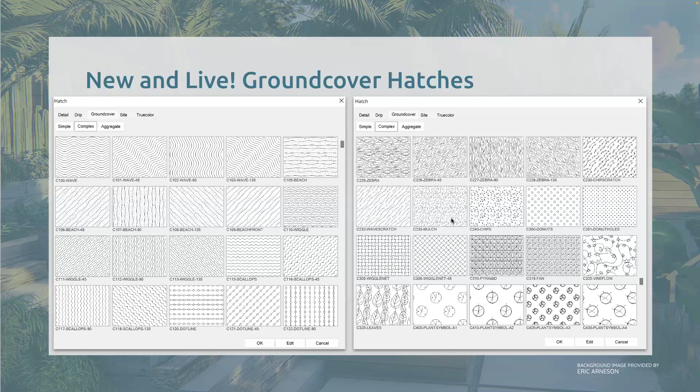This also means we've been able to experiment and start adding new hatches. It's actually on our roadmap for content to add even more hatches to this library. If you have an example of a hatch or pattern you'd love to see, even one you hand drew yourself, send it in to us and we can see about making it into a real hatch now that we have this process nailed down.

Next, new and live: we have Revit type parameters for the Planting FX Revit plugin. There's a guide, and you'll get a notification if you have an existing plan with instance parameters on how to upgrade that to type parameters. Please reach out if you're having problems with that. We're working through a few things on it, but we have a lot of new Revit stuff coming up that relied on that fix.

Next, we're starting to reach out more about what people want in terms of wish lists, starting with a survey. Molly put a survey onto our community forum at landfx.com/community. I encourage you to open a browser, go to landfx.com/community, it's pinned to the top—Molly's 2-minute survey. I recommend filling that in to help her know what you need in terms of expanding the database for our plants. Depending on how successful this is, we might do this again for other features, or make it a regular habit.

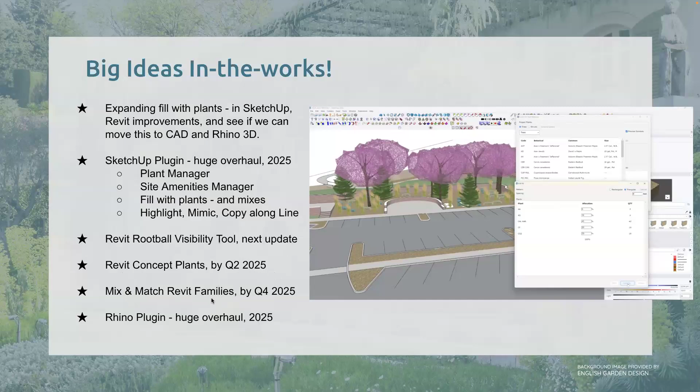Anybody who uses Revit has probably already heard me talking about that. Okay, last slide before we jump in and really start to tackle some of the questions popping in: do you have a suggestion? I just gave you a lot of things, all of these were big ideas that somebody asked us for, and now we're doing them. So how do you get your idea noticed and to the top of the list? Because I can tell you, it's a long list already.

When you put in a suggestion, please be kind. We're human. We've dedicated our careers and lives to this software, and we're really proud of the things that we've done so far. So please be kind in your suggestions. That really goes a long way to getting us to notice your suggestion too.

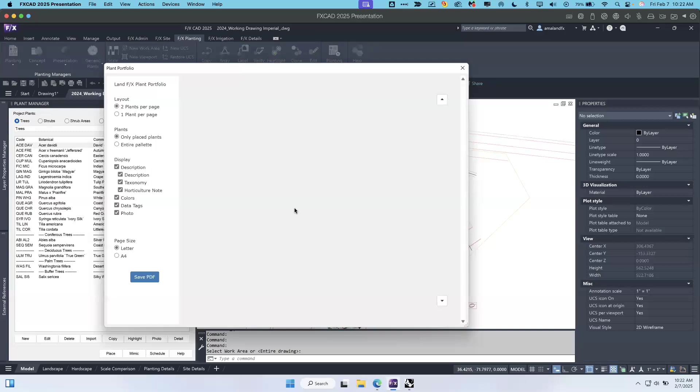So I'm just going to click this, and I'm going to do the entire drawing. It brings up a web browser. This is a little bit improved from the last time that we showed this. You can now do 2 plants per page or 1 plant per page. I've just condensed it down to 2 plants here, only placed plants or the entire palette.

And then you can choose what information you display. Don't want to show colors, not really important to you, take it away, it updates. You can also add it right on back. Don't want the photo? You should want the photo. But if you don't, you can take it away. You can customize how this looks.

You can choose the page size. Right now we just have letter or A4, but do give feedback on an example of how you want it to look. If you feel this really needs a different page size, give us feedback on how you would want that layout to look. What are you aiming for?

Any feedback on this plant portfolio - that's exactly what we want, to see that example of what you are trying to achieve. Helps us out a lot.

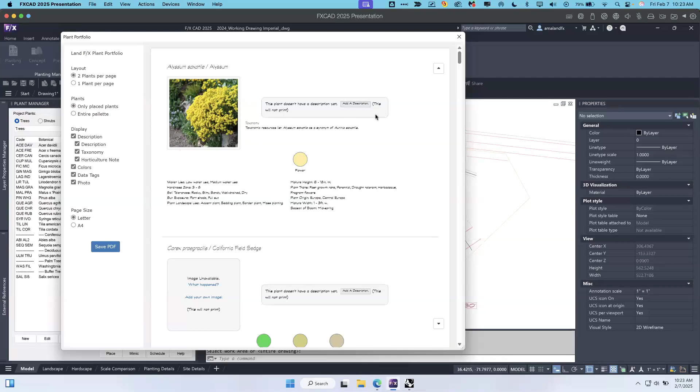So right now it's obviously still in its infancy, so some things need more information on the plant. Like this one doesn't have a description yet, so I can add a description, but as it says, this will not print. And I can go through - this says image unavailable, what happened? Add your own image, that's the process I was talking about.

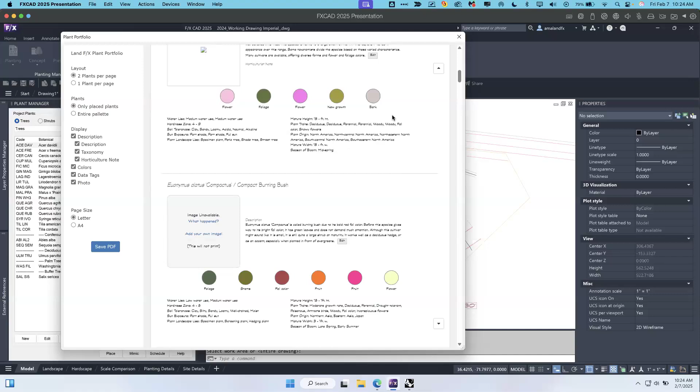So you can see all of this - this will not print. And when you save this PDF, obviously that kind of information is not going to show, and you will just get that final PDF that you can present to your client with more information about each plant in here.

So that is really cool, definitely give that a shot. You'll also notice as we go through here there are flower colors and flower accents, and that affects how things show in the bloom schedule as well. So you can absolutely add all of these.

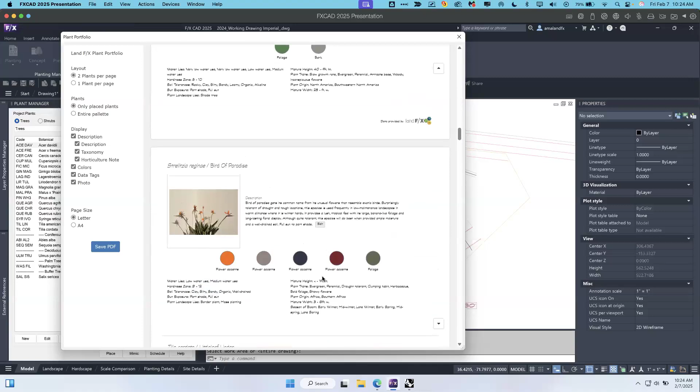I am going to close this, and then the other thing I wanted to show was the new SketchUp tool. I see somebody just asked how do I find and install the SketchUp plugin. You do want to go over here to the 3D connection, and in here you're going to see this link right here - here's our plugins for all of those 3D connection platforms.

If I click this, it's going to take me to this page, and you do have to install it using this RBZ right now. While we are doing these improvements, we have pulled it from the SketchUp extension warehouse, so you can only install it from here. And if an update is needed, you also have to install the update from here, so keep that in mind.

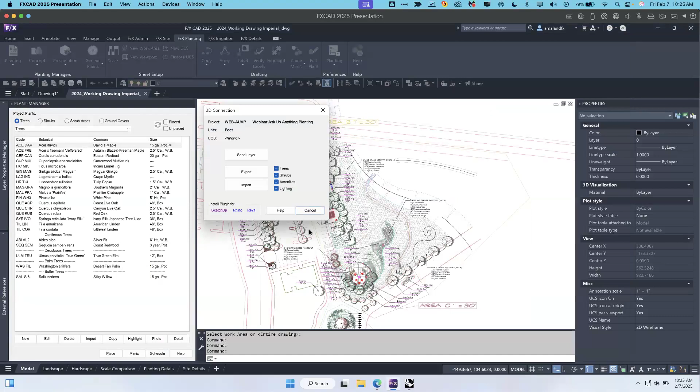Let's keep going - I'm just going to go over to SketchUp. You guys have probably already seen, a lot of you already know you can take all these plants and export them to the 3D connection and import them into SketchUp. But I'm going to go to SketchUp just to show you some of the new things that are coming in.

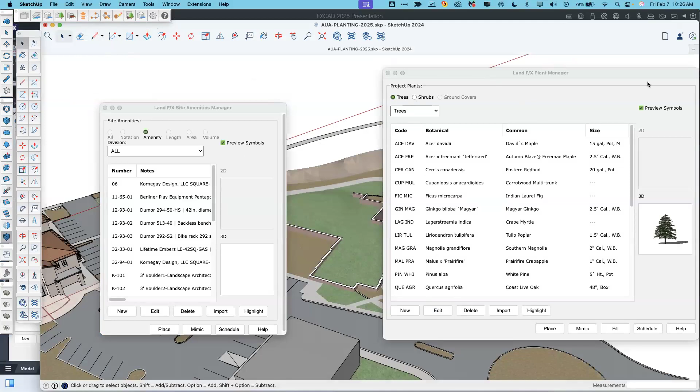So this is the new toolbar. I'm not sure when this is going to be live, but a lot of the things on here are already on here. The things that aren't are this plant fill or mimic and fill and copy along, as well as this plant manager, and the site amenities manager does not look like this yet.

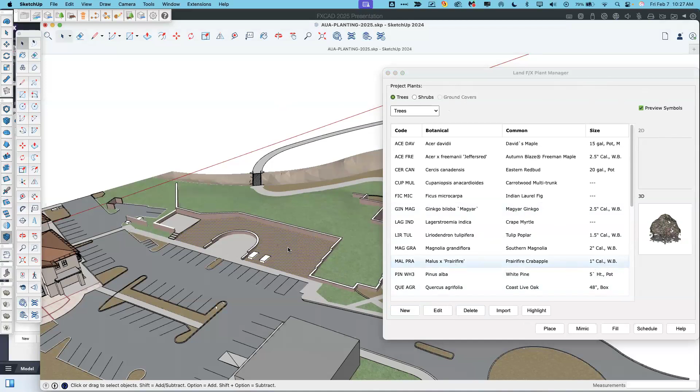But then I can place from here, and I'm going to see - yeah, I can select a face. This is the really cool one - and then do fill, and then choose plants, plural. I can do plural plants. So let's see if... oh, I don't know if that one has a symbol, but we'll see.

Let's do this one, and where's another, not a tree. Let's see, red twig dogwood. There we go. Okay, I'm going to go next.

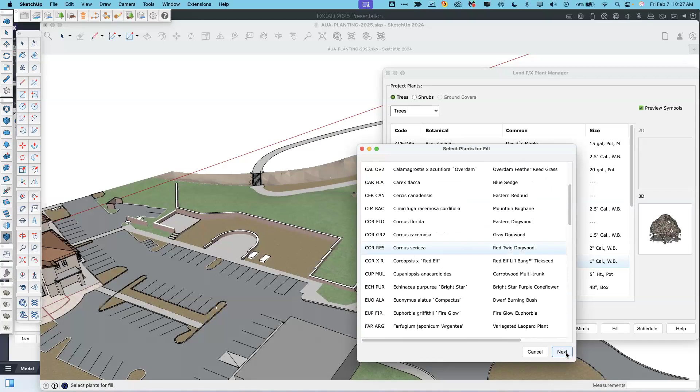33%, that's fine. I'm going to do maybe 10 feet so it doesn't go crazy, maybe even 20 feet, just so it doesn't have to calculate too much, and apply. There we go. I can reapply, and it should shift that around. Still working on the performance on it, but it is thinking through it. Maybe I'll go a little bit smaller and apply.

And you can see it's going to get rid of the existing plants already in there. So like a scatter tool. There we go. That is our first iteration of this.

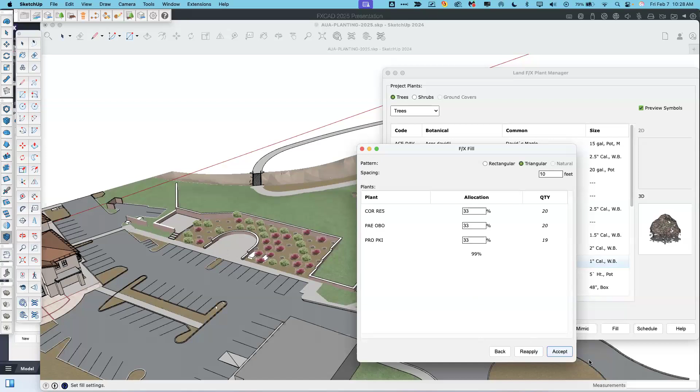And this is going to expand to all the platforms, hopefully, as soon as we work out in each API how to accomplish the same thing that we're doing here in SketchUp. I'm going to accept that. Let's go, and it's going to be okay once it's done.

Okay, let's go back to CAD though, while that finishes thinking, and let's figure out what questions we want to answer so far.

Who's first up? Yeah, we've got a few. Oh my gosh.

First, a couple of people work with flats, and it sure sounds like they were unaware of how we have that already built into the software. They both say how they're doing those flat calculations off on the side in Excel or something. So if you could just show how to assign flats to a ground cover, that'd be awesome.

Yeah, let's go to a ground cover, and I'm going to grab this creeping thyme. That's a common one that would be in a flat in different plugs. So I'm going to edit that one over here and change that from a number 1 size pot to let's go with flat over here, and the container type I'm going to say plugs.

And then that adds to here instantly, that flat count appears. So that means what you're going to do is go ahead and say how many plugs are typically in that flat. So let's say there's 24 in a flat, and we're going to keep this plant spacing at 4 inches. And I'll say, okay.

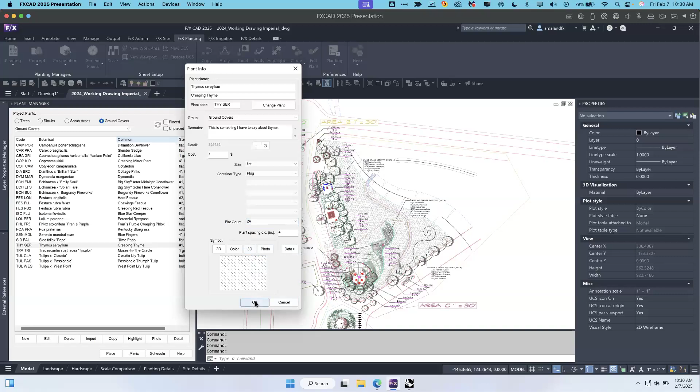It's going to update anything in here, but just to be sure, I am going to do a rectangle over here. There we go, nice big area. Lots of creeping thyme. Place. There we go, there's that creeping thyme placed.

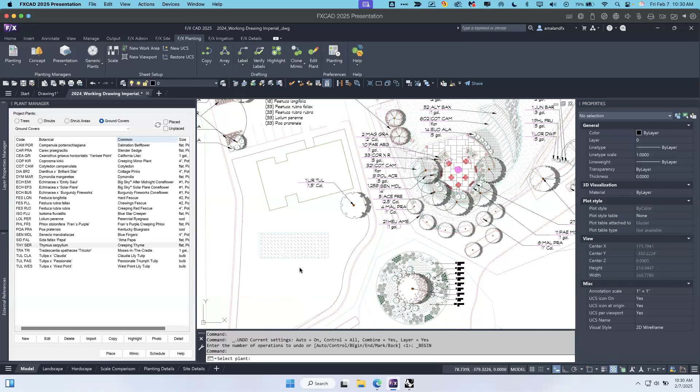I can do a label. So when I do a label, I can grab this one. It is going to show the individual quantity of plants in that area, not the flat count. That is actually how many plants in that area.

And then when I run a schedule, let's go over here, schedule. Yep, looks good, symbol code. Awesome, okay. I'm just going to do the whole drawing instead of a work area. It's going to go real quick. Love the new plant schedule.

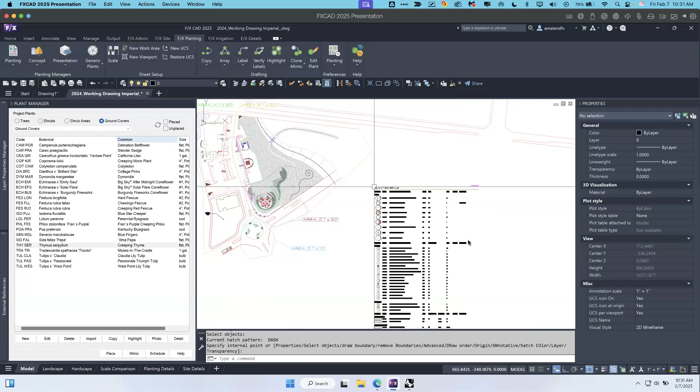Okay, let's go down here. Thymus, it's a flat. And this quantity shows the number of flats versus the individual number of plants. So that is how that works.

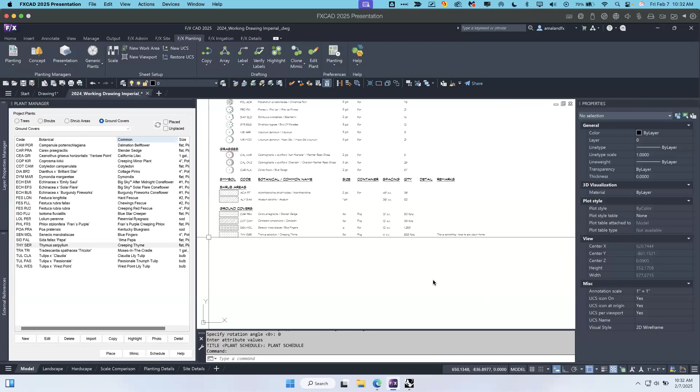always nice to show Mimic, all the amazing uses of Mimic, and it's a good one that people tend to not be aware of. Can happen.

Yeah, absolutely. So I've got a bunch of different trees in here, and based on comments, I need to change them. Just the species, I can go up here to clone or mimic and drop that down, and it's clone just does the copy of the plant. Remember, we do recommend using clone or Xcopy or any of these tools to copy a plant block instead of the native AutoCAD copy command. It just carries the X data with it. But same with mimic, mimic is even better.

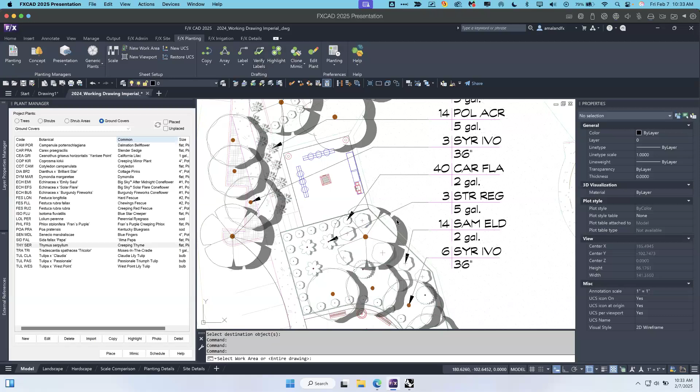So I can grab mimic and I can take this symbol and apply it to this one, and boom, now it's that real plant. And if I run verify labels, it is going to tell me that now this plant is unlabeled, so it must still be being picked up by something accidentally. This is a test drawing on me, but that's how that works.

And then the other cool thing about this is Mimic can actually even turn blocks that are dumb and have no data at all. So this motorcycle, it's just a block that we got from this Plan Graphics, a motorcycle block we put in here for context, right? Has no data on it at all. It's just a block.

So I can copy that one around, or I can clone it as well. Copy, there we go. I have a bunch of these.

I can actually use Mimic. I'm going to go back to FX Planting and use Mimic. I'm going to grab this shrub and mimic it to this block.

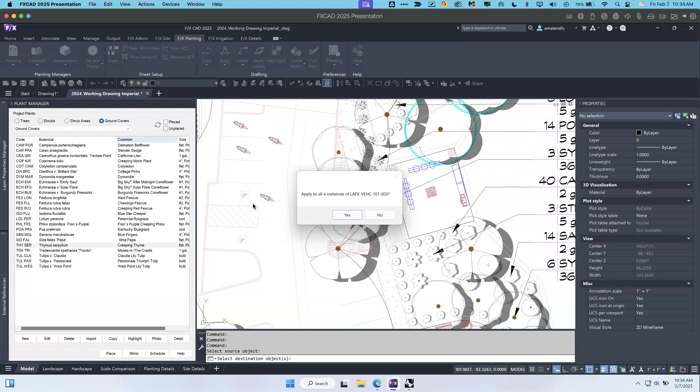Already it's saying, hey, that's a dumb block. It doesn't have any data, not a smart block. I notice there are more than one of it in this drawing, and I'm going to give it data. This tool is going to give that block data when it mimics it, but it sees there's more, so it's asking if I want to do this to all of them. I can just say yes.

Bam, all of these are now shrubs. So I can go ahead and group label them just like that, and they'll be included in the schedule.

So you can see this is super powerful if you're trying to convert, say, a plan that your office did before Land F/X, or a plan from a surveyor or something like that. Very powerful to get data on all of those items, and it's so quick to transform all the blocks into the right thing.

Then you have the power of the plant labels, the plant schedule, the verify labels, the highlight, and all these tools that rely on that data. It's always a good idea to convert an old plan, it will always save you time, pretty much.

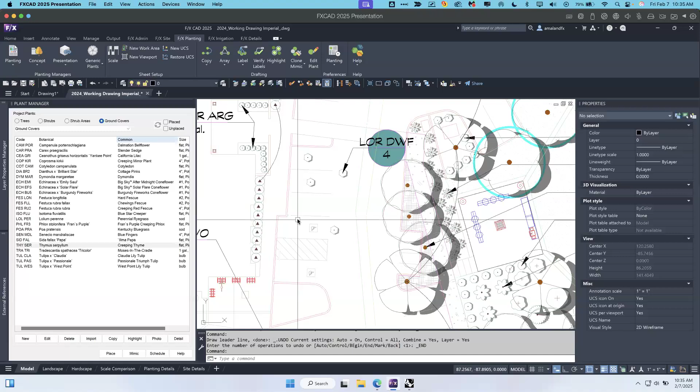That is Mimic. Did I miss anything on Mimic, do you think? I don't think so, but I'll admit I was busy with all these other questions, so I wasn't exactly following. I'm going to assume it was great.

Another great one is work areas. Patricia chimed in and sounded like she just hasn't been using work areas. And then another person chimed in—I just didn't grab their name—saying they'd love to see the all work area option when sending to Excel.

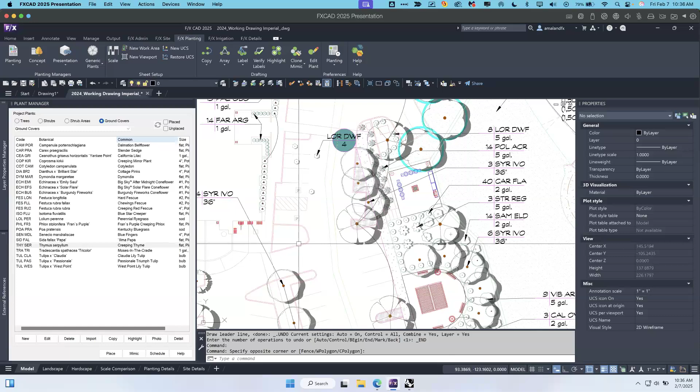Okay, let me see. I really think it's just for organizing the quantities, but then specifically seeing, either for a schedule for just a single work area or the all work area option, how that comes up in Excel.

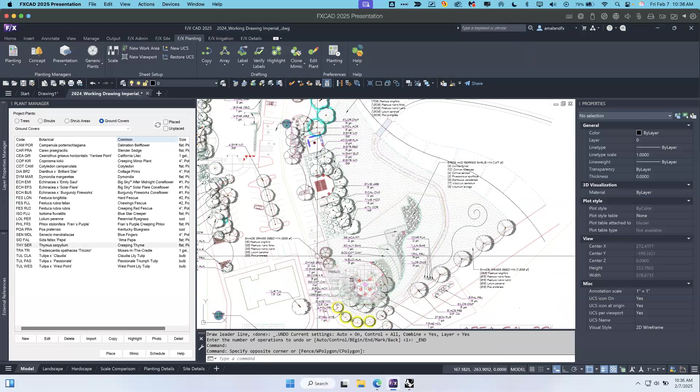Okay, it looks like I've got to install Excel on this presentation virtual machine, but in the meantime I'm going to get it running on my Mac because I know it's there. One sec, Excel—there it is, okay, I know I can open it up over there.

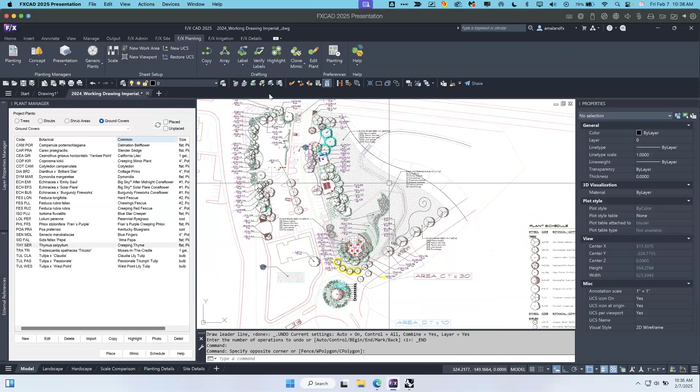And so let's start with work areas. Let me get rid of this highlight because we don't need it at the moment. So I do have work areas set up in here. We're having a problem refreshing the view—there we go, okay.

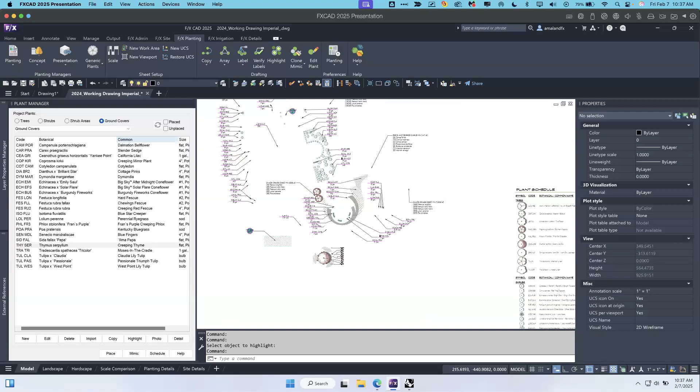So for instance, I have a work area down here, area D, and I actually have set this work area to a different scale than the rest of my drawing.

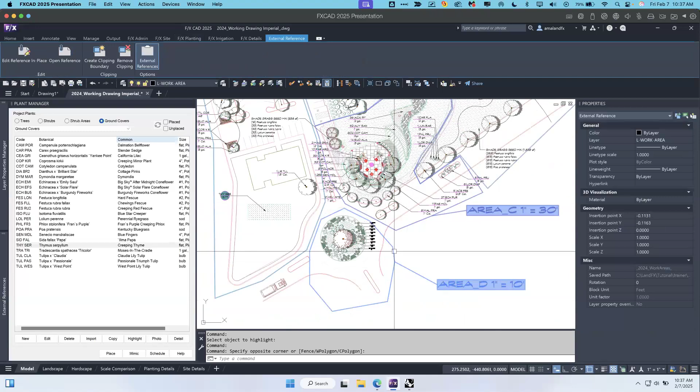The way that I created this, I can just easily create it again. Actually, this one is in an XREF, so I'm going to freeze that XREF for the moment, or delete it. Let me see what I want to do—I'm going to unload it and just use work areas normally in this drawing for the moment.

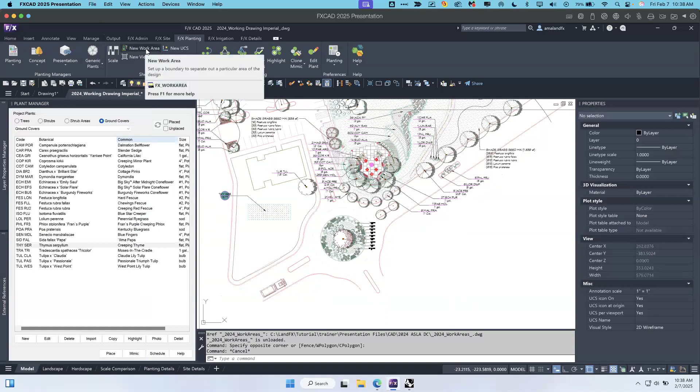There we go, okay, so let's pretend we're just doing a work area for here. I'm going to go over to New Work Area in any ribbon, pretty much, and click it. It's going to ask me for the title, so this was area space D.

There we go, and I can either choose the plot scale—so this is defaulting to the world plot scale that you all know you always do up here and scale before you're able to place anything. You can either keep it the same or apply a new scale. So say this is an enlargement area, I'm going to set this to a 10 scale because that's how big my viewport is going to be for it.

I can even at this point apply an area D suffix, which will amend the layer name of any Land F/X objects placed inside of it after the work area is created. It doesn't retroactively apply to everything it finds inside it when you place it.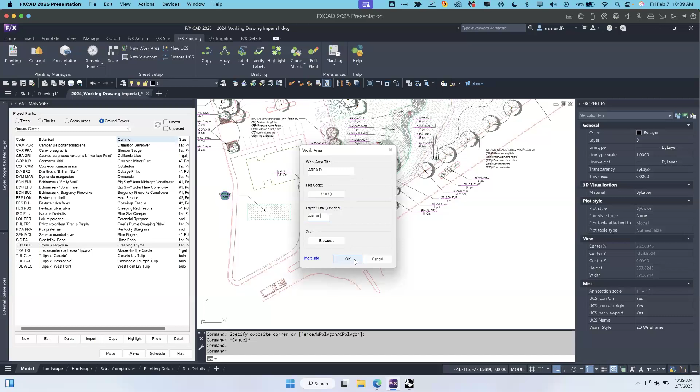So I'm just going to do this. I'm going to do an F3 to get rid of my snaps, and I'm going to place this down. Again, in work areas it captures everything where, if it's a block, the insertion point falls inside of it. So if I do this, it won't capture that tree because the insertion point is on the trunk.

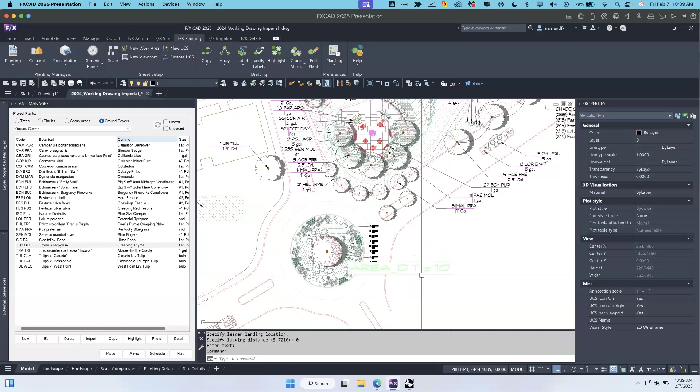It won't capture it. Also, for any hatch areas, the majority of the border must be completely inside the work area—they can't just be snapped to the edge, that's considered outside, it's just a majority of it. It gets these colors—it looks a lot better on a black background, which is what we normally do, but I'm just going to change it to blue for now. The color doesn't matter, it's on a non-plot layer.

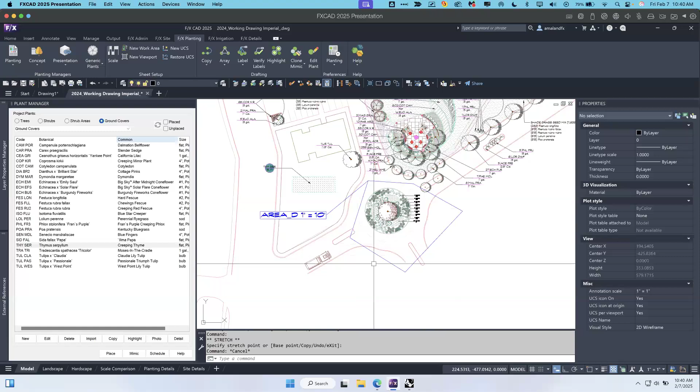And there we go. I'm going to move this tag to the side. It's an mLeader tag, do not delete it.

It must be there. Now I've got a work area and I can run a schedule. I'm going to do a new schedule. Symbol size, detail - I don't need detail. Let's just do a really small schedule with no remarks.

And I am going to do okay. At this point, if there is a work area present in any way in this drawing, whether it's in an XREF and attached appropriately, or in this drawing proper, it is going to ask you when you run a schedule, do you want to select a work area, or right click to just do a schedule for the entire drawing and ignore work areas.

In this case, I only have one work area, so it is not giving me the option for all work areas. If I have more than one, it will give me that, and I'll show you that in a moment. So I am just going to click on this work area.

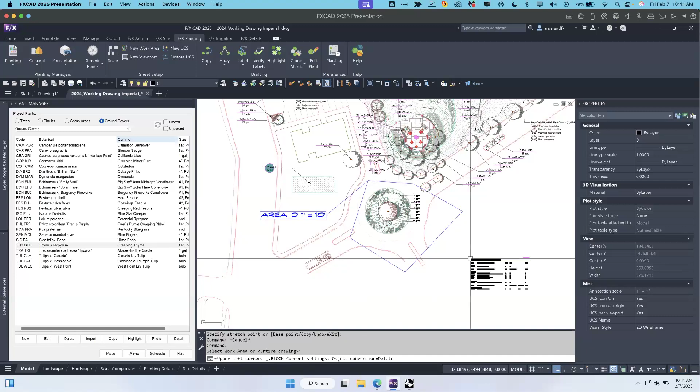And then I'm going to place this, and you can even see it did the schedule at the same scale as the work area. But if I just move this up, it's a plant schedule for area D, and it's only including the quantities of the plants inside of there.

So you can see there's this Quercus agrifolia with a quantity of 1.

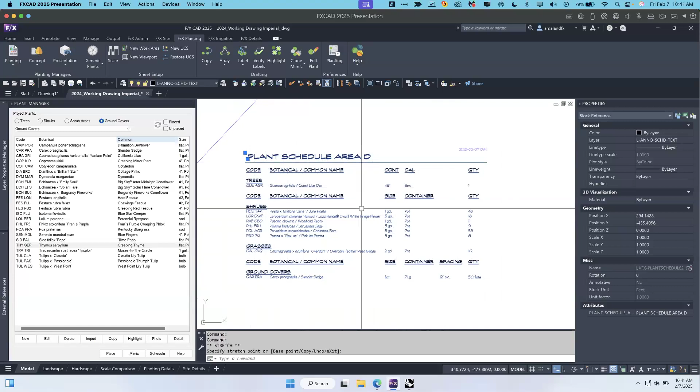Let me just do one quick thing, and I'll show you some things that have changed with work areas. Not changed, but we'll start with all work areas and then the thing that's changed.

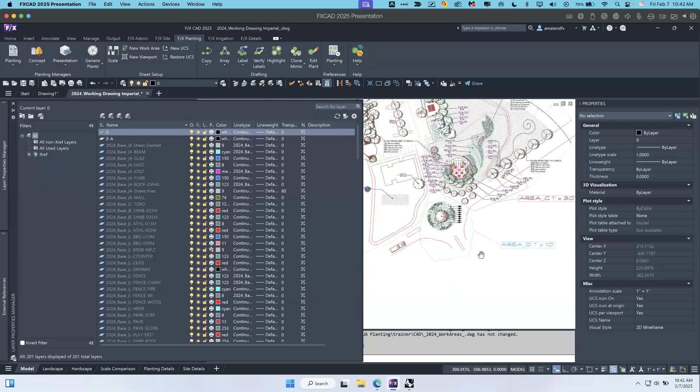So I'm going to go ahead and reload that XREF. So this XREF with work areas, I have followed our procedure on how to send the work areas out to - let's see if I can get rid of this - there we go, out to an XREF instead.

And so that they are in an XREF, I use the procedure to then bring them back in properly, so they're on the right layer and they're all linked with the same project and everything, so that they will also get recognized as if they are in this drawing. And this is great because then you can apply the same grouping of work areas to multiple different drawings that are all in the same project.

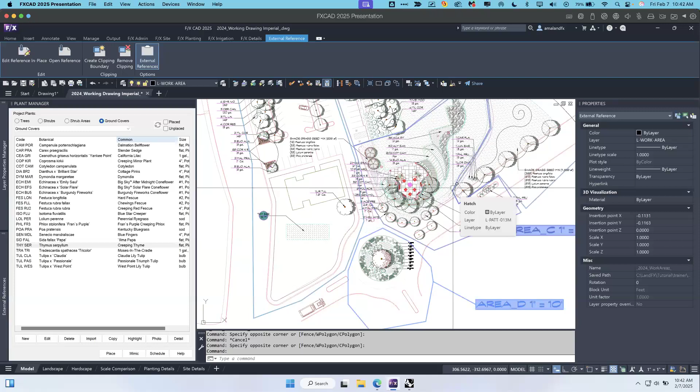And now that I have more than one work area, if I run a schedule, let's go schedule. And I am going to do a new schedule, and this time, perfect, okay. It's going to ask me if I want all work areas because there are multiple, so I'm going to tap A and enter.

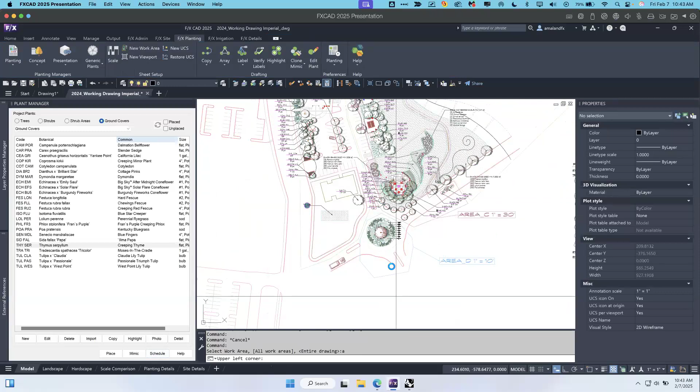And it's going to think for a sec, and then we're going to pop it down and it's going to do its thing. So here we have the total quantity of the entire drawing, and then all of the plants in each work area in my drawing broken down.

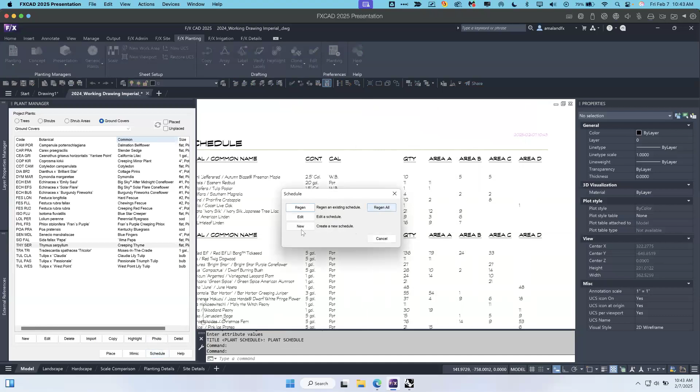And I can go further. I can do this as a subtotal or anything, or I can do what the question asked, and I'm going to go new. And instead of doing a table in this drawing, I'm going to go to a spreadsheet.

And same thing, and I'm going to say okay. And we're going to do all work areas again. And if you have Excel installed, it will open up Excel right away.

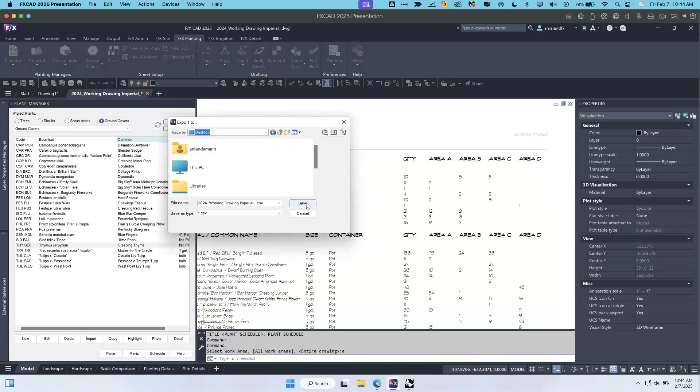I have Excel installed outside of my Parallels virtual machine, so I'm just going to save this at the moment on my desktop. Save. And I'm going to go over to my Excel, which should be open now.

Let's find it. I just have some things in the way. There it is. And I am going to open on my Mac in my desktop.

Let's see, where did it save to? You should be able to just - oh, it might have gone to it. It probably went into my desktop in my virtual machine. Wow.

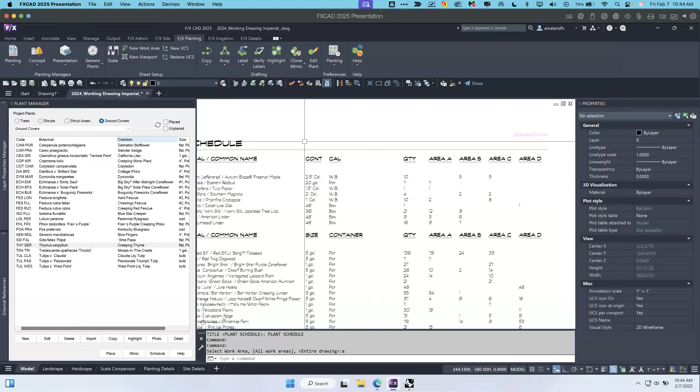But let's - it looks just like that in the Excel version, it does look just like that. Let's see, ah, it's gonna bother me that it went to the wrong one.

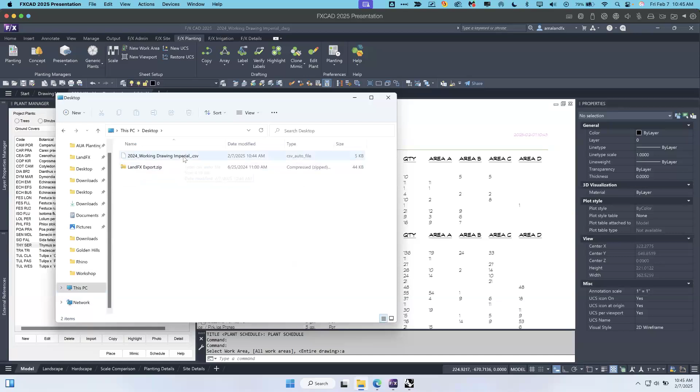Let's get that over to desktop. Oh, that was easy, okay. Excel, there we go. There it is, okay, open. There we go.

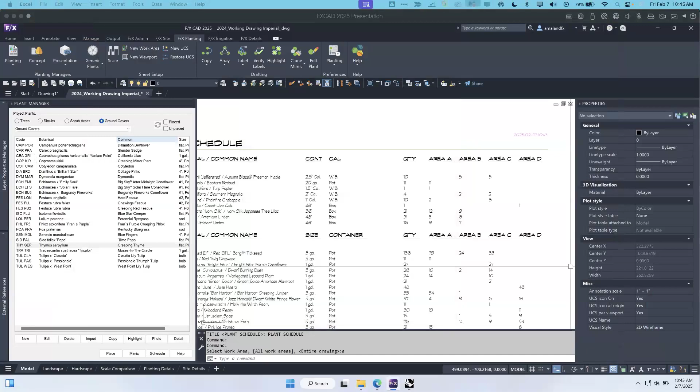There. Exactly the same.

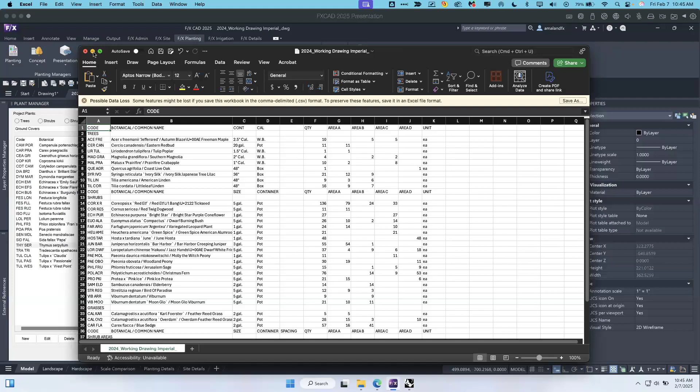I usually recommend when you go to Excel, separate out. I like separating out the botanical and common names into different columns. I just find it's easier to coordinate with other formatted Excel, so you could just do whatever you want with this. Hopefully that answered that question.

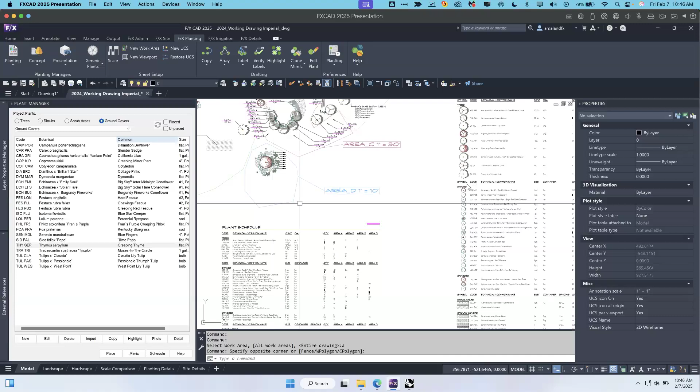Another good schedule one. Dylan was saying that he loves the plant portfolio, but it's one plant per sheet. When they've done something similar, they'll do approximately 8 plants per sheet, which saves some paper and works for them. I was wondering if there might be something like that. One option is you can run a schedule with just a photo and botanical name, and that's a pretty concise schedule that might do everything he wants.

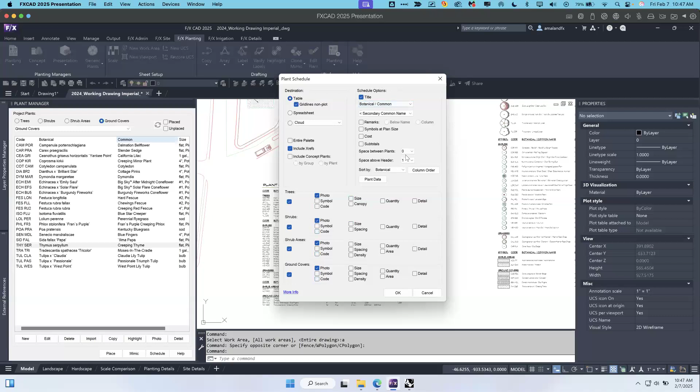I really like how customizable this new schedule redo is. For showing photo and turning off everything else—turning off quantity, turning off code, turning off size—it makes a very, very concise schedule. Maybe that's exactly what he'd be after. That should be good.

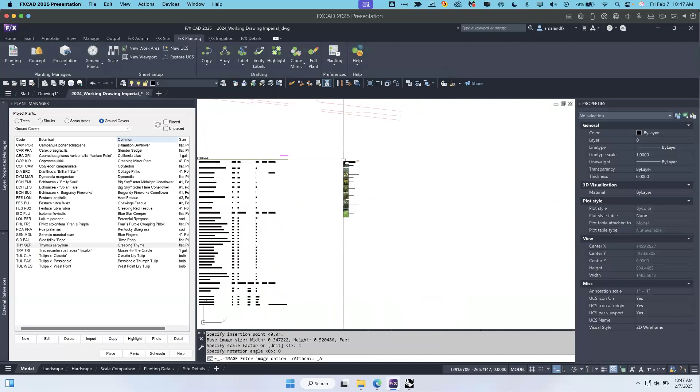I'm going to do it on this work area again, just to make it a little smaller in the preview. Right now, since I've assigned all of those photos to those plants—I might have assigned them in a template and imported them into this project—it was just loading all of those images into this drawing as it was going. So you could totally take this and pop it into a layout space over to the side with any of the information you want. You could even add the remarks under the name.

That's a great idea. I didn't think about doing it that way before. Pretty cool, yeah, I love the look of that.

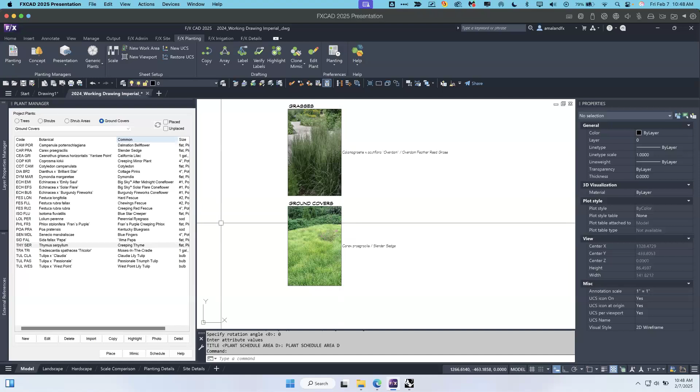Another one, Susan had a very quick question on plant labeling. She said, for instance, you label a row of plants, but she'll miss one. So it's very simple, showing how to use that group label button to reassociate a label with a different group of plants to pick up a missed one. Oh yeah, that is the best for this.

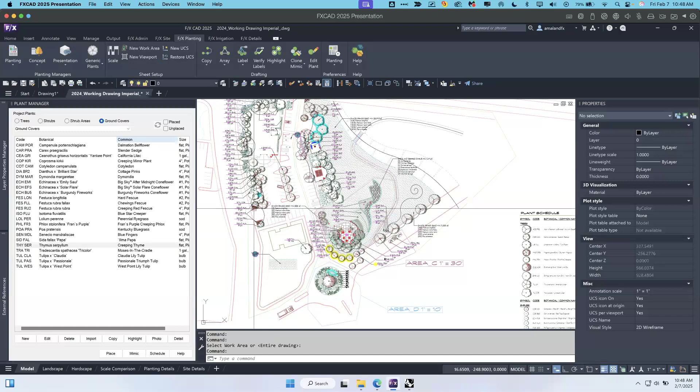I'm going to go over to verify labels, and I actually have this exact situation set up here in this drawing already. I'm going to right click to check everything on the labels. Circled in cyan, circled in yellow—I have right over here that kind of situation where I went over it and didn't quite get them all. Or maybe that last one was added—it's a new plant that was added later after these four were already labeled.

This reiterates the importance of using clone, mimic, these array tools, Xcopy, and copy along polyline and line to make copies of your plants. Because if plants are already labeled and you use the AutoCAD copy command, it likely won't get picked up by Verify Labels because it's holding the exact same block ID as the one you copied it from, whereas using our tools makes a new block with a new block ID. So with that aside, here's how you fix this situation.

Once you see that this has happened, I can go over to label and group label. I don't need to delete it and make a new one—I just need to select the label. So just like with anything in AutoCAD, look at the command line; it's trying to tell you what you need to do next. It's saying select a sample plant in the group, or a label to modify, or G for ground covers. Those are your options here. Always remember to read the command line on these things.

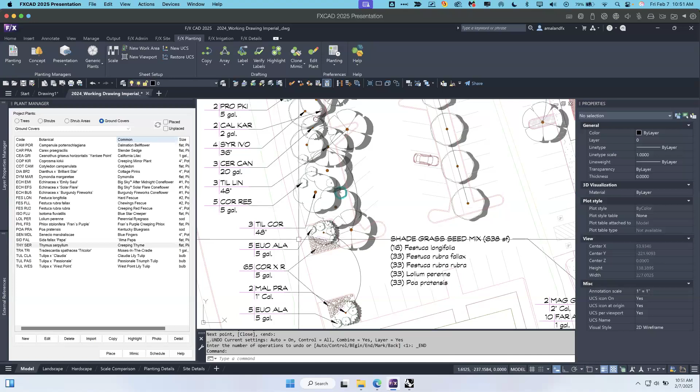I saw a really good question just now pop up, so I'm going to grab that one. Are you doing anything specific to get your plant labels so neatly placed and stacked as they appear to be spaced the same? Or is this just good drafting snapping? Oh, you're making me give out all my secrets, aren't you?

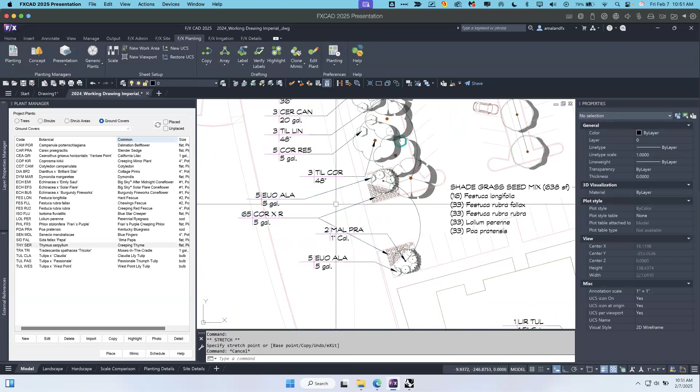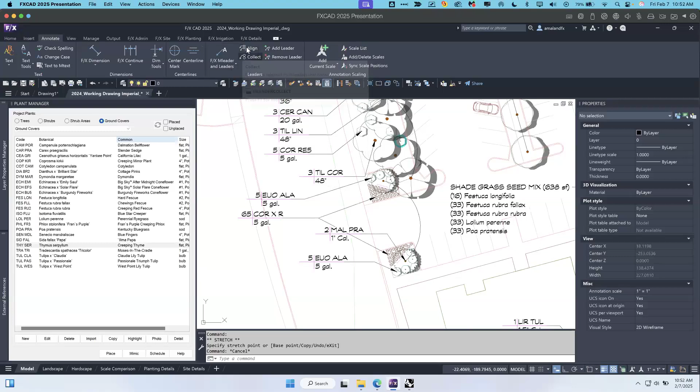I'm actually using a tool to do this, and it's not even a Land F/X tool. So the reason we made these as smart labels, let's do this. I went through and just kind of plopped them all down. I want them to be all nice and lined up. I can go over to my annotate ribbon, and this is in the same place if you're not using FXCAD, if you're using regular AutoCAD or Civil 3D - the align tool for these plant labels. Because they're MLeaders and the align tool works on multileaders, I can use this regular AutoCAD command on them. I'm gonna select all of them and right click to accept that selection. Now I can just realign them, but I don't want to do that because their vertical spacing is kind of all over the place too.

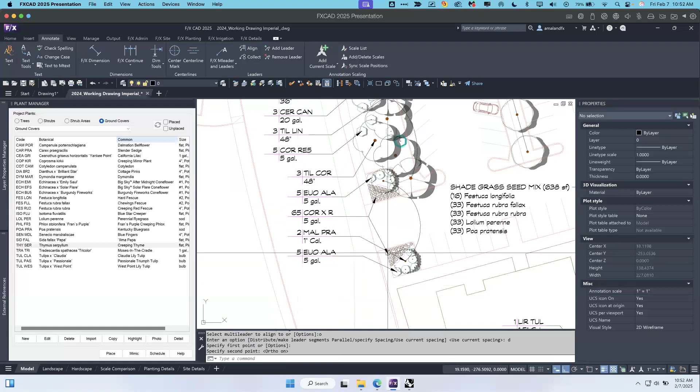So I'm going to go to options. I want the vertical spacing to also be neat and tidy, and I'm going to go to distribute. You can see all the other options, you can play around with this, but distribute is my favorite one. I'm just going to put this right here, click here, and then ortho F8 until it looks nice. Bam, just like that. Maybe I do this again to fix up this overlapping, but you get the idea - that's how I get all my labels to look perfect.

I did a power tip before where I also suggested you can start using grids and grid snaps. Basically, just make sure the offset is the same in your planting preferences, and when you're placing them down, you can use the grid.

That power tip is up here. I'm just going to go through here - videos, power tips. My ribbon is a bit broken at the moment, but you can access this through the ribbon as well. Power tips and plant - I think it was advanced plant labeling tips.

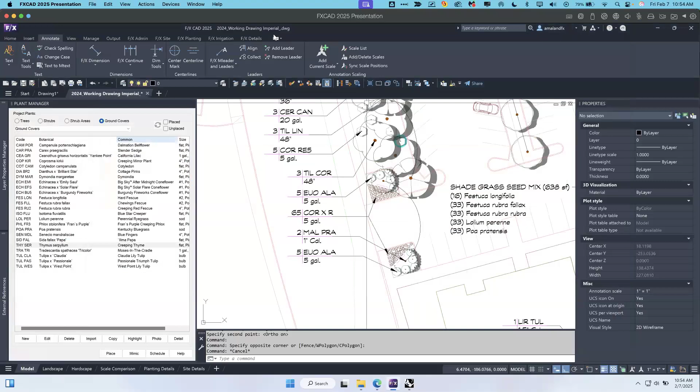2019. I've had several firms tell me that this power tip is actually required learning in their Land F/X training. They've added it to their training documents internally for their own office, which is really cool. You can also find it up here under help and power tip. If you click on that, it will open it up, but my ribbon is broken at the moment because I'm fixing it.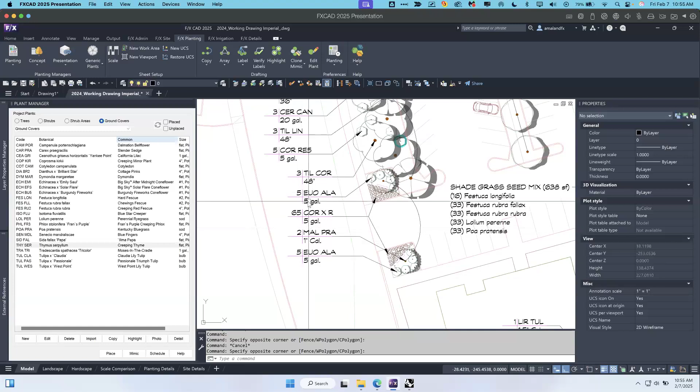Kaylee was just asking about phasing and how difficult it is to fade back the plants from the other phase. She said very simply, trees in phase one, and then the shrubs and ground covers in phase two, as an example. I said, just in CAD, really the best way to show phasing is put them in a separate DWG. So you just got to isolate those trees, W block them out, make that a separate DWG, and then now you have that easy control through the XREF layer. I don't know if you have any more that you would want to say or show for that.

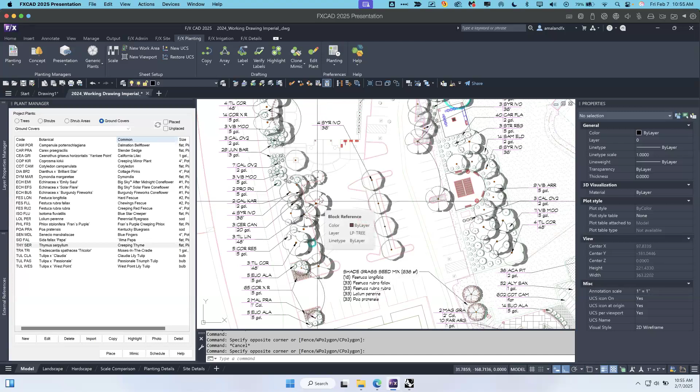I think that I would actually pop open the power tip for that one that we did. So the first one is cross referencing. If you do not know what this term means, you need to watch this power tip. I just had a presentation with university students today, and I was like, you got to use overlay XREFs so that you can avoid circular references and start cross-referencing your XREFs together this way so that you can work in two different files, have those trees in one and the shrubs in the other, but still be able to see the shrubs in the tree file and the trees in the shrub file. So you need to follow this power tip to see how to best cross-reference your plans that way. And then I do have another power tip for phasing.

See if that shows a phased planting plan. It's been a while, that's a 2016 one. I haven't watched it in a while.

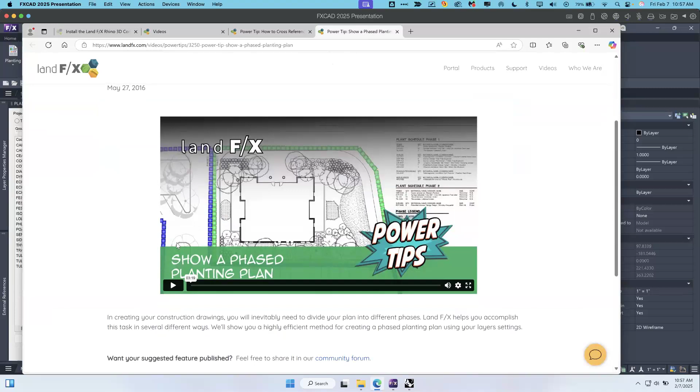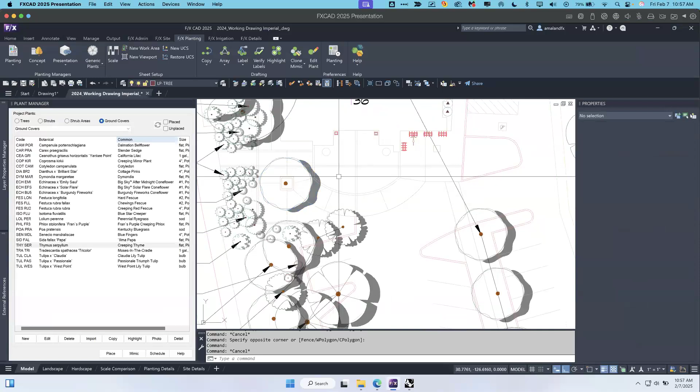I do think I cover almost this exact thing, where some of the plants are in an XREF and I use those layer controls to then just gray out all the LK layers. Because if you know our plants, I'm going to grab this guy right here and explode him. So he's on the LP tree layer, but the whole block is on that layer. So if you set LP tree to gray, none of this line work is going to look gray.

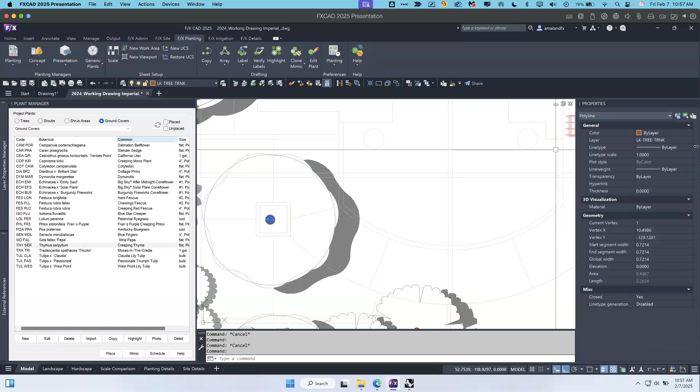So if I explode this, you can see—I'm not going to do a block edit, but you normally wouldn't explode these—all the line work inside is on LK tree with the intended line weight for that. So that's 025, that's 035, this is trunk, right? So if you go through an XREF and change those LK layers, they will turn gray.

And you can do that by separating them into different XREFs. Then you get the control to go through your layer properties manager and go through your XREFs and do an XREF layer override. And if you don't already know the fast way to do that, you can go to FX Admin under general tools, layer tools, X layer.

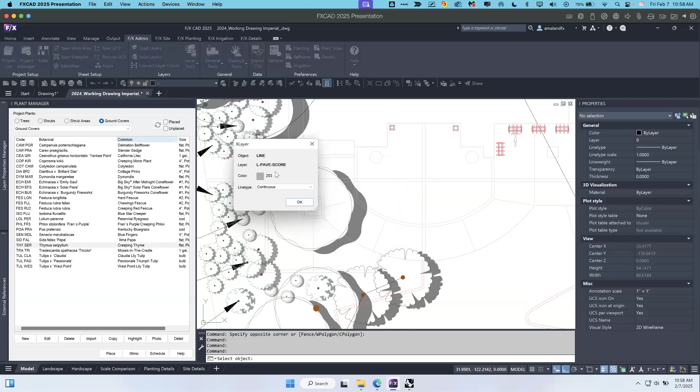And this is my XREF. I'm just going to click on this line. It's telling me in that XREF, it's on this layer and it's set to this color. I can change that color to anything. Say, okay, and that's going to change it—but it didn't actually change it in the XREF. All it did was change the XREF override in this drawing.

So that's the way to do it. You can do that too, or you can do it through a viewport. In this case, for that situation, you would want to change the viewport override of that XREF layer to gray for the LK layers.

One minute—do we have a one minute question, or should we wrap it up? Well, just definitely, I think, yeah, you know what? Perfect, I think this will be absolutely perfect for one minute.

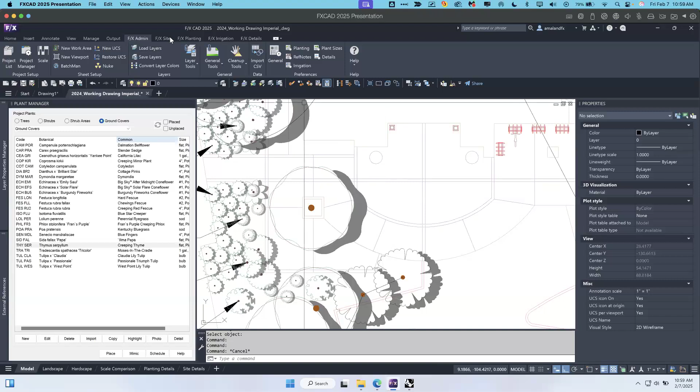Okay, also verbal—but Dylan chimed in with a fantastic, very lengthy request mentioning from his manager basically what they want out of the concept schedule. They do primarily restoration design, and they're primarily using the concept schedule, so completely understandable that these wish list items would come from them. Because if you're using basically just the concept schedule, they would like it to have more customization options.

So really from the concept schedule dialog box, the easy one he was saying: fill and spacing should be separate columns, wanted that as an option. Also wanted to specify an amount of clear space under the trees. So since it's calculating trees and shrubs and ground cover in a single concept area, they would like to be able to specify a clear space to be avoided underneath the trees and calculate the available space for shrubs.

Yeah, just shrubs—very good point, right? It's exactly what we would imagine. And I think that also cuts right to similarly, people who do tree remediation plans are like, oh, I've got all kinds of wish list items. When you do a niche thing like that, that is not well covered by Land F/X, of course you're going to have ideas. And I love the input, Dylan, and I love the thoughts of your manager.

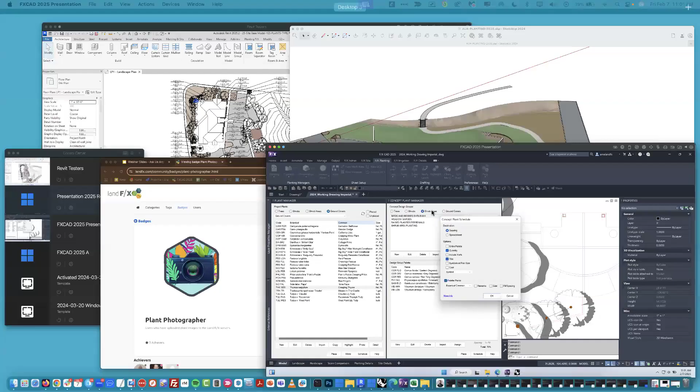What's going to make that one step better? Send us an example of your ideal schedule. That's going to help, that's going to go a million miles. So same thing, if you do remediation plans, send us an example. Like Amanda always asks me—even of her—Amanda, it'd be neat if it does this. Amanda, you got to send me an example of what you're after, and that's going to do wonders.

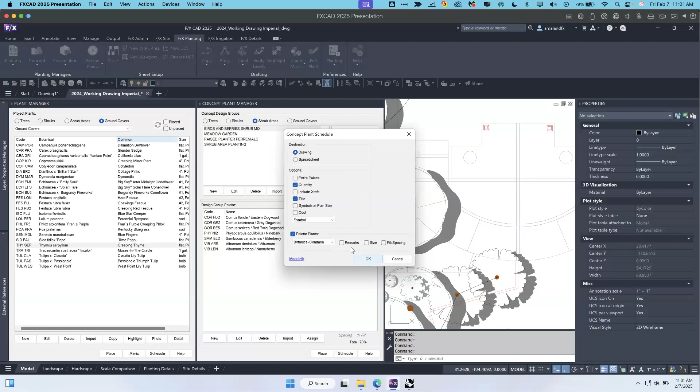And we had a couple of other questions that were also very similar. An idea is one thing, but go ahead and mock up that example, or grab a schedule from one you did before Land F/X and send that in. That's really all we need to just grasp the idea, and it helps amazingly. As I always say, the time it'll take for me to try to guess what you want and engineer it, and then to have you go 'oh, that wasn't quite what I wanted'—do you think I want that to happen? No, you got to send me an example, that's all that it is.